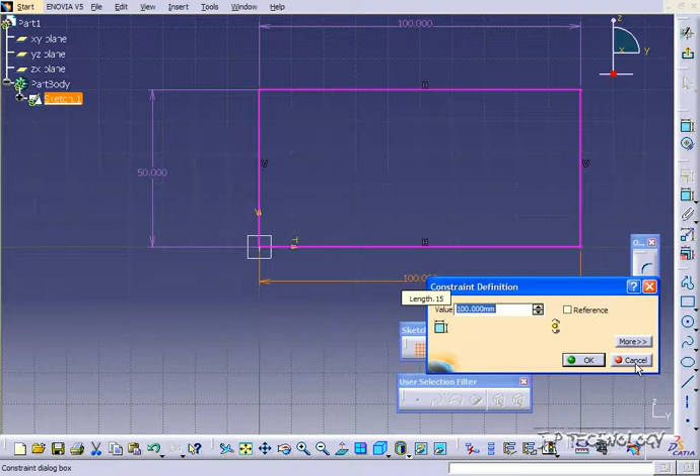Now if I was to put another dimension on this side for the 100, you'll notice that it will be purple. When you see purple such as this, it means that your sketch is over constrained. So if I go in here and edit it, it's going to disrupt everything, and it can't happen. It's over constrained. It's not going to work. So whenever your sketch turns purple, it's over constrained, so you're going to have to delete a dimension.

So I can either delete this one or this one to make my sketch normal and not over constrained. So let's delete this one up here, and now everything turns back green. Green, good to go. Everything's fine. Nothing's over constrained.

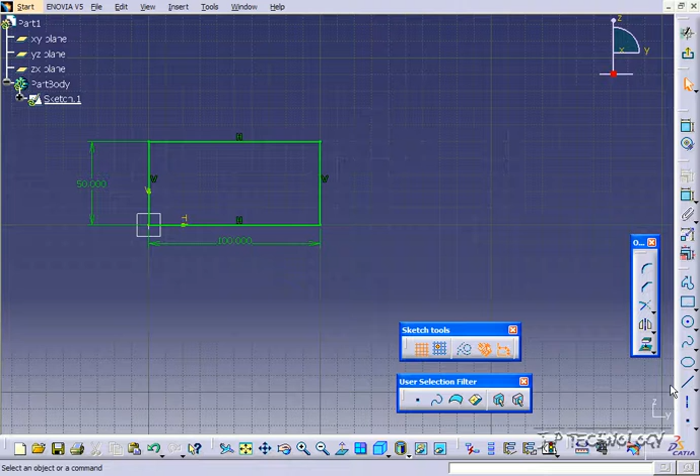Now let's draw a few lines. So let's click line, and we'll draw a line just like this. And you'll notice that the blue line means that it's at a 90, and when I put it on an angle, it's back to white. And when it's in line with that sketch, I'm getting that blue line, so I'm able to make it the same height as that. So let's make it the same height.

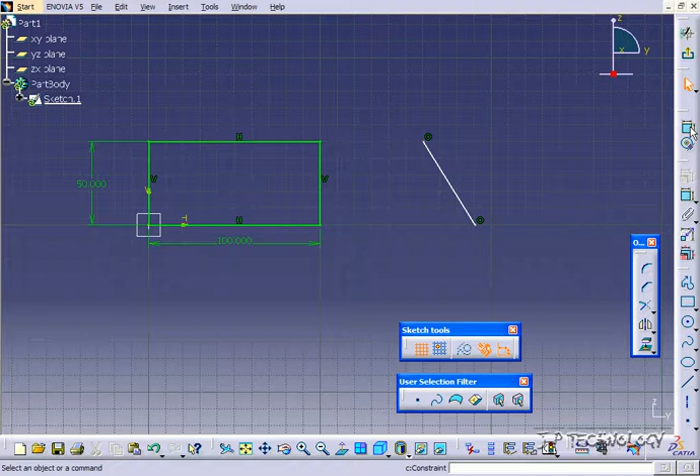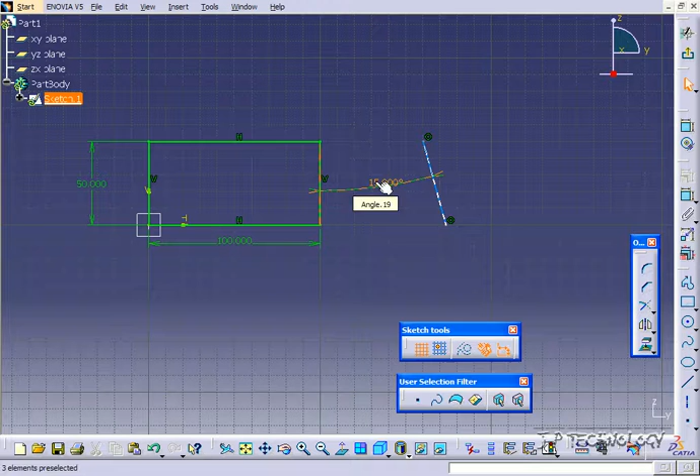And now let's do an angle, this angle from here to here. So let's click constraint, and we'll click this line, and we'll click this line, and we get an angle. Now to change it, we'll double click on it, and let's change the angle to 15 degrees. Click OK, and now we have 15. Now let's double click, and we'll change it to 70, and now we have a 70-degree angle.

Now if you double click on the angle, you're also able to choose the angular sector. So it gives you different dimensions for different sectors. As you can see, as I'm scrolling through and selecting each one, I'm getting a different angle for it. Now most of the time it's going to give you the smallest angle, the one that you want, but sometimes it doesn't, so you may have to toggle through the sectors to get the right angle. So we'll click OK.

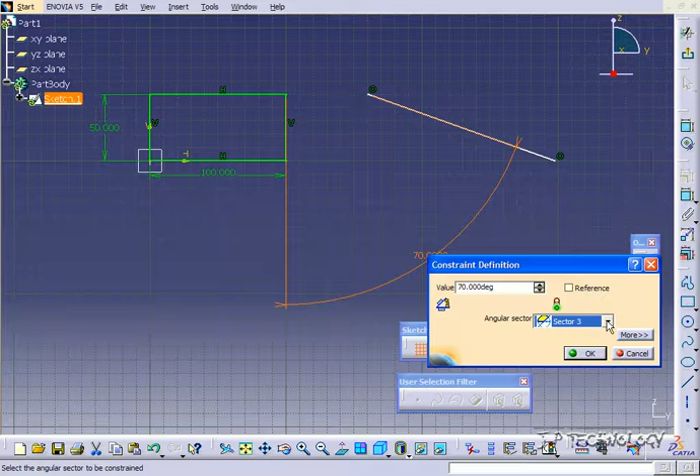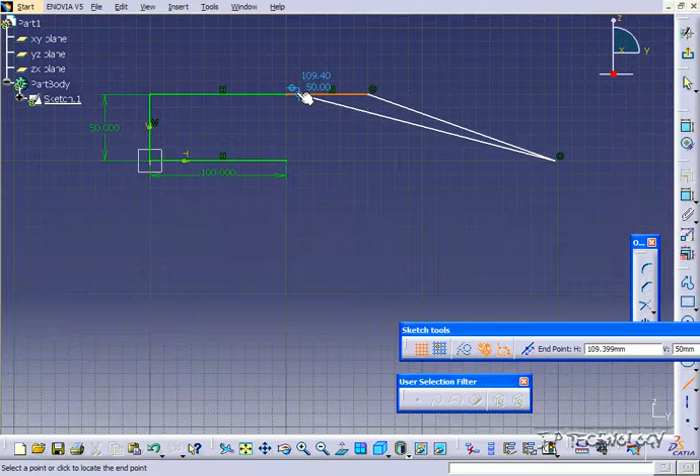And let's delete this face here, and let's just close up this sketch. So we'll click this line, and we'll connect from that point to that point. And you'll notice whenever you connect point to point, you'll have a circle filled with a dot in the middle. Now if we click from this point to this point, and say we're just on the line, you're just going to get a circle with a line through it, meaning that it's coincident. If you actually have it right on the dot, you're closing the sketch.

So let's close that there, and let's click OK, and we'll exit the workbench, and now we've created our sketch there. And that concludes our tutorial on how to dimension your sketches within CATIA V5.